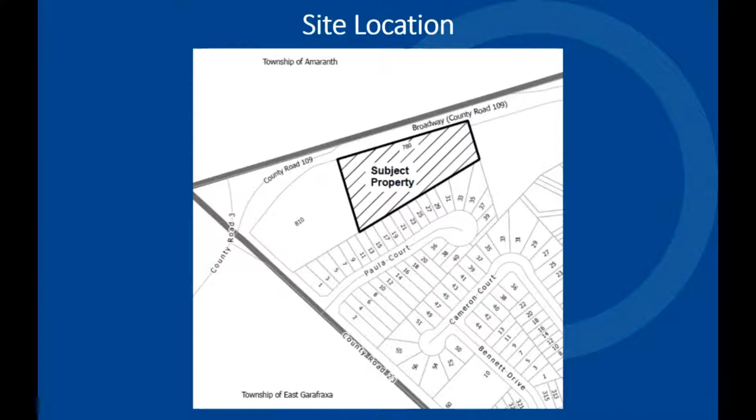It's situated just to the west of Riddell Road and to the east of County Road 23, otherwise known as B-Line. This is an air photo of the subject lands.

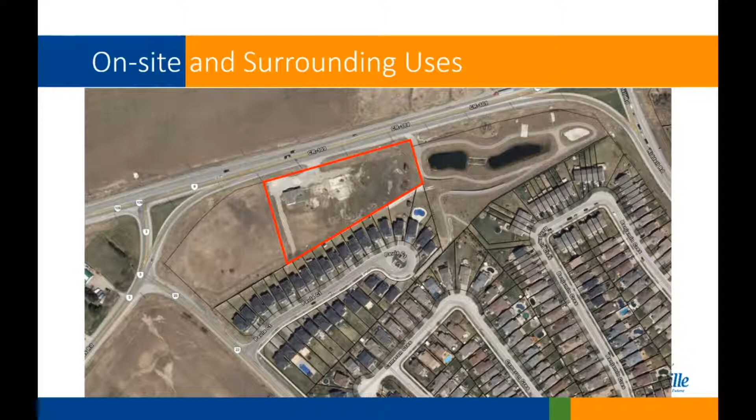As you can see, there's predominantly low-density residential connected with Paula Court to the south, as well as some townhouse developments on Benjamin Crescent, just to the southeast of the subject lands. To the east is a stormwater management facility, and beyond that, the lands to the north and west are vacant.

As I mentioned earlier, the applicant is present and will be speaking in more detail about this proposed development, and they'll provide more information about some of the particulars of the proposed site layout.

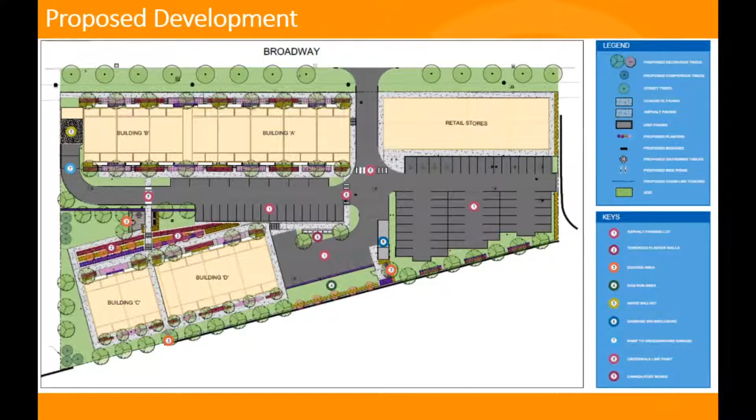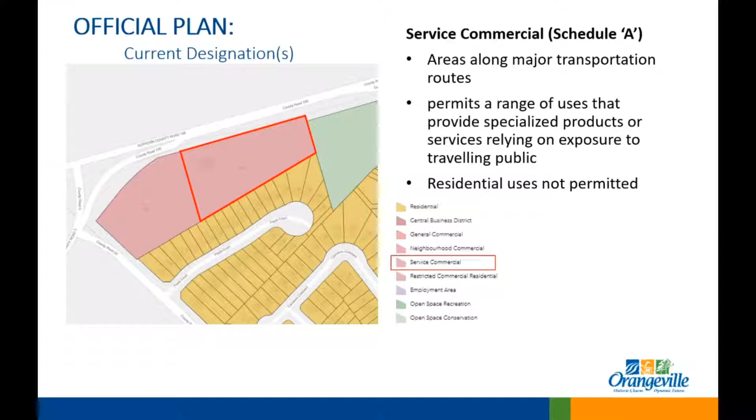Residential uses are not permitted in this designation, so the applicant has submitted a proposal to amend the official plan designation at this location. They're seeking to redesignate the property to neighborhood commercial.

Now, this designation applies to more localized areas, generally situated in response to nearby residential areas. As a result, these areas are intended to serve the day-to-day needs of those surrounding residential areas. Some of the uses permitted include limited retail, personal service uses, convenience retail, things of that nature.

Residential uses are permitted in the neighbourhood commercial designation, albeit only on upper levels above permitted commercial uses. So the applicant's amendment is proposing to add a site-specific policy to address that residential use permission on upper levels to accommodate the proposed development.

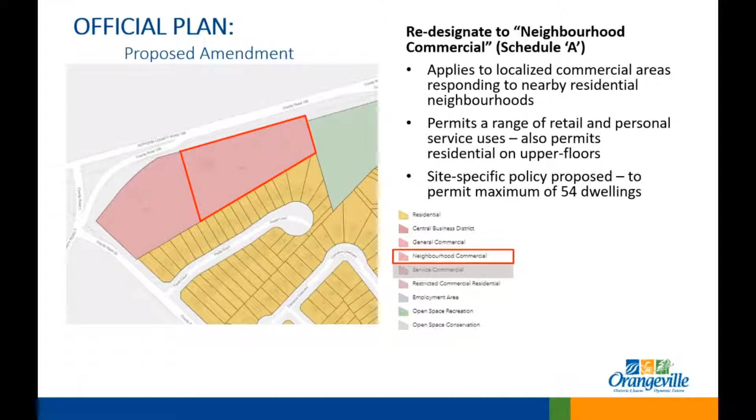The site-specific policy is to permit 54 dwelling units consistent with what is being proposed. In terms of the zoning bylaw, the subject property is zoned service commercial, again permitting a similar range of uses to what I mentioned with respect to the official plan policy framework for these lands.

There is a site-specific special provision applied to these lands. It permits an upper floor dwelling unit on the property. The language of this provision is very specific, and looking back at its history, it was introduced to the site in the late 90s as part of a broader town-wide commercial zoning bylaw review and update exercise that changed the commercial framework for the town.

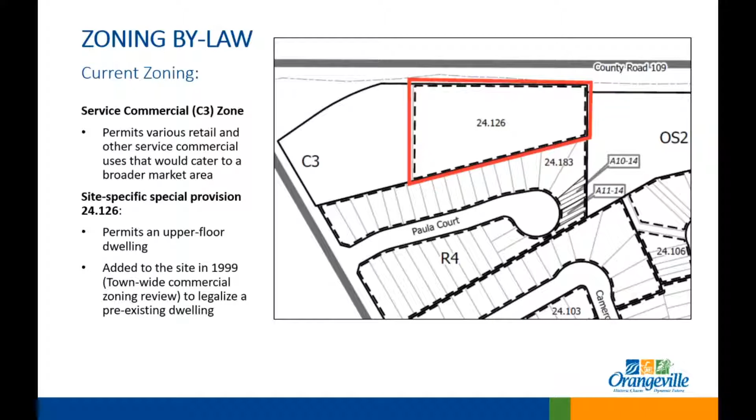As part of that amendment, there apparently was an existing residence on the property, and as part of the rezoning through that exercise, in order to avoid it from being deemed legal non-conforming, they added this special provision to basically acknowledge and legalize that existing use at that time.

So the proposed amendment is similar to what I described with respect to the official plan amendment. It's to rezone the property to neighborhood commercial, the C2 zone category, again to permit a range of commercial uses similar to what is considered by the neighborhood commercial designation in the official plan.

Similarly, they are proposing a site-specific special provision to accommodate some aspects of the development proposal, particularly with respect to building height and, again, a limitation on the number of units contemplated for this site.

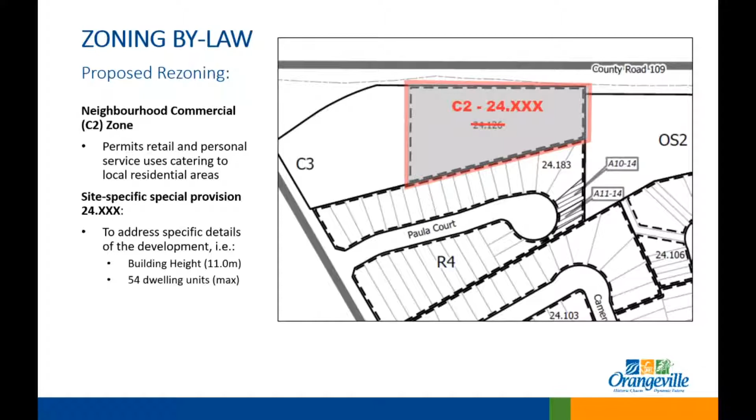So in terms of the comments received thus far, when the applications were deemed complete late last year, we did issue a notice for having received these applications. To date, we haven't got a whole lot of detailed comments. We've received more or less some inquiries about what is happening at this site, what the development proposal is, etc.

I do note there are some submission correspondence pieces on tonight's agenda recently received. Again, the purpose of this meeting is to obtain further feedback to that effect from interested members of the community. In terms of the circulation to agencies and departments, we've received fairly typical conditions from the major utilities and other public agencies.

Township of Amaranth was circulated on this given the proximity of these lands to surrounding neighboring municipalities. They've indicated no concerns with this application at this time.

We have received some detailed comments from some of our key agencies. I won't get into too much detail because there's more information in the staff report on tonight's agenda. Our infrastructure services environment division has reviewed this with respect to source water protection implications, providing comments on potential impacts to groundwater and conformity with the source protection policy regime. Our Transportation and Development Division has reviewed this with respect to servicing, traffic, and stormwater management.

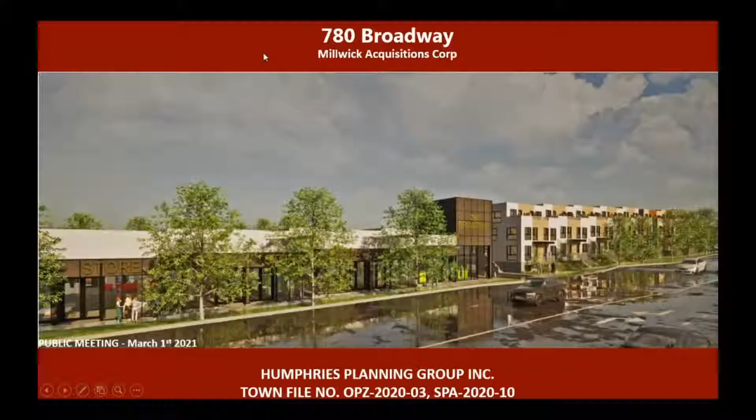Is everyone able to see my screen? Yes. Yes. Yes. Okay, wonderful.

Well, to start, good evening, Your Worship, members of council and members of the public. My name is Hisham Mohammed with Humphries Planning Group, and I represent the owners of the lands municipally known as 780 Broadway. The subject land is located at the western boundary of the town of Orangeville, within the inner edge of the existing urban settlement area between Riddell Road and B Line.

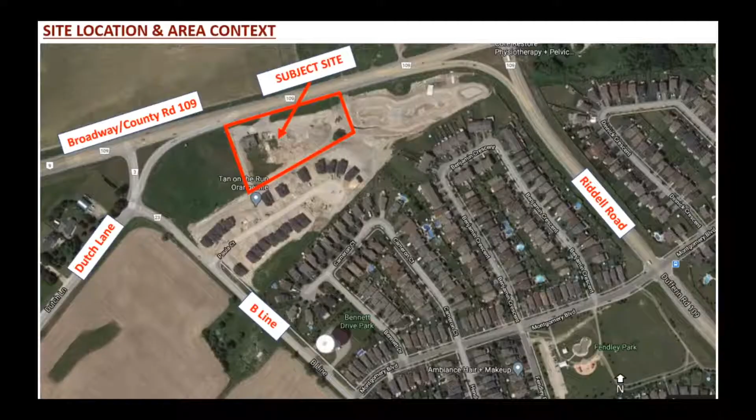The site is irregular in shape, has variable topography, and represents a significant decline in elevation from south to north along Broadway. The surrounding land uses consist of Broadway or County Road 109 and an employment area under the jurisdiction of the Township of Amaranth to the north, a vacant lot to the west, a low-rise residential neighborhood with single-detached, semi-detached, and street townhouse dwelling units to the south, and a stormwater management facility to the east.

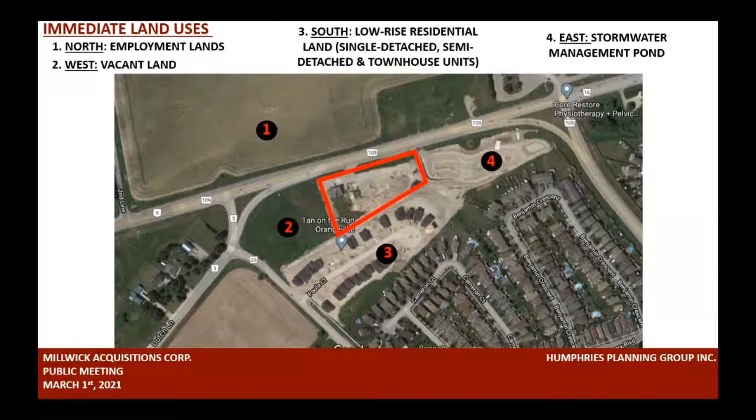The subject site has an area of 1.15 hectares or 2.84 acres, with a lot frontage of 163.68 meters along Broadway, and there's currently an existing temporary sales office on site.

Applications for an official plan amendment, zoning bylaw amendment, and site plan approval have been submitted to the Town of Orangeville to facilitate the approval of a mixed-use development consisting of 54 back-to-back townhouse dwelling units, as well as a standalone multi-unit commercial building, approximately 920 square meters in GFA, and a development density of 46.95 units per hectare.

There are 154 total parking spaces, which complies with the zoning bylaw requirement. The residential component consists of 108 total spaces, 48 surface parking, and 60 underground parking spaces. Additionally, the retail component contains 46 surface parking spaces.

Vehicular access to the site is achieved via an entrance from Broadway, located at the center of the site, which will be shared to serve both the proposed residential and commercial uses of the development.

An internal system of walkways establishes a comprehensive pedestrian circulation route, which serves to connect the various townhouse blocks, commercial space, amenity areas, as well as surface parking and the underground garage. The underground garage is accessed via a ramp located at the western property limits, extending from the internal private laneway.

A loading area, snow storage area, and bicycle rack have also been incorporated to service the development, and a shared waste collection area is proposed interior to the site and has been designed with a fence enclosure to screen the garbage bins.

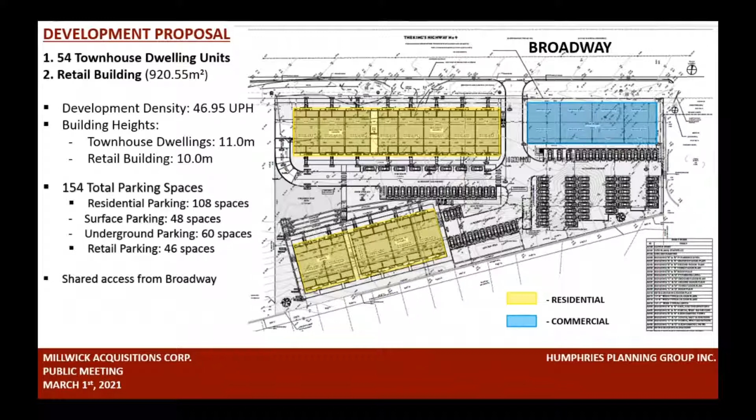A planning justification report has been submitted as part of this application and illustrates the proposal being consistent with the regulations and policies of the provincial policy statement, the growth plan, and the Dufferin County official plan.

The Town of Orangeville official plan identifies the subject land as being designated as service commercial. The purpose of the official plan amendment is to redesignate the lands from service commercial to neighborhood commercial in order to permit residential uses on the subject land.

The OPA seeks to recognize a broader potential for the subject land and expand upon the permitted uses, which already includes commercial uses. The proposal provides for an appropriate mix of uses and is compatible with the surrounding context. Additionally, it should be noted that residential uses are in fact permitted in the zoning bylaw.

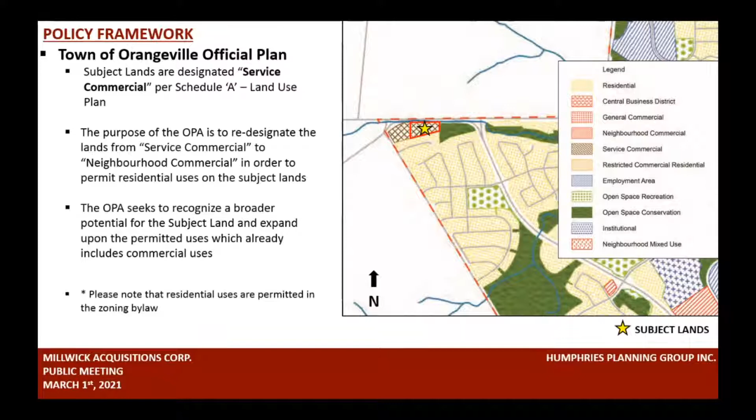The subject lands are currently zoned C3 service commercial and subject to special provision 24-126 per the Town of Orangeville zoning bylaw 22-90. Special provision 24-126, as Brandon had mentioned earlier, provides for additional permissions on the subject land, including dwelling units on upper floors of buildings containing permitted uses.

The proposed development will require a zoning bylaw amendment in order to facilitate the development of standalone residential uses. Currently, residential dwelling units are only permitted in upper floors.

The rezoning will replace the current C3 service commercial zone with the C2 neighborhood commercial zone in order to implement the proposal and to allow for the establishment of residential uses together with commercial uses on the subject land.

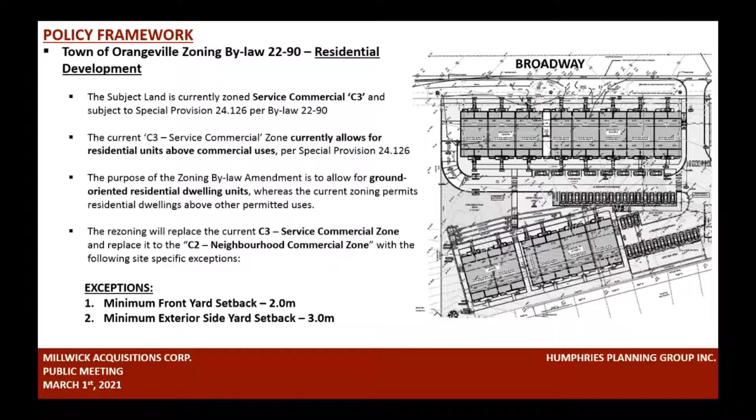Additionally, a number of site-specific exceptions are being requested in order to modify some of the neighborhood commercial build form standards, as you can see on your screen here.

The residential component of the development has been located on the western portion of the site and has been arranged into 4 distinct townhouse blocks of various sizes, each containing a specific number of dwelling units.

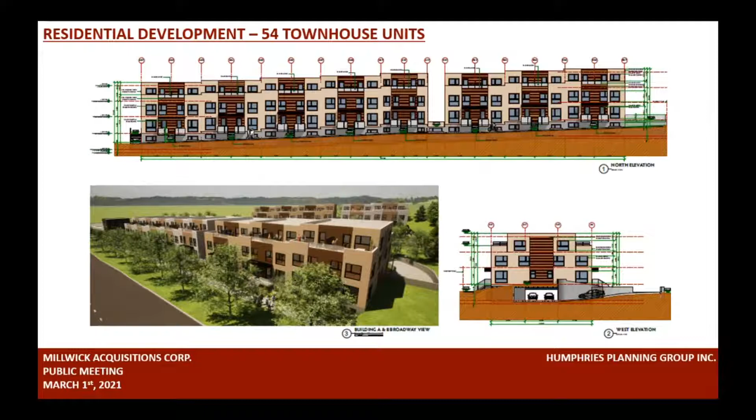As I had mentioned before, the residential development includes 108 parking spaces, or 2 per unit. 48 spaces are located on the surface, whereas the underground structure comprises 60 private garages corresponding to each unit and accessed via a ramp extending from the internal private laneway.

The residential townhouse buildings are 3 stories in height, or 11 meters.

The commercial component of the proposal is located on the east side of the development and is 920 square meters in GFA. The current C3 service commercial zone allows for commercial and retail uses, along with residential uses.

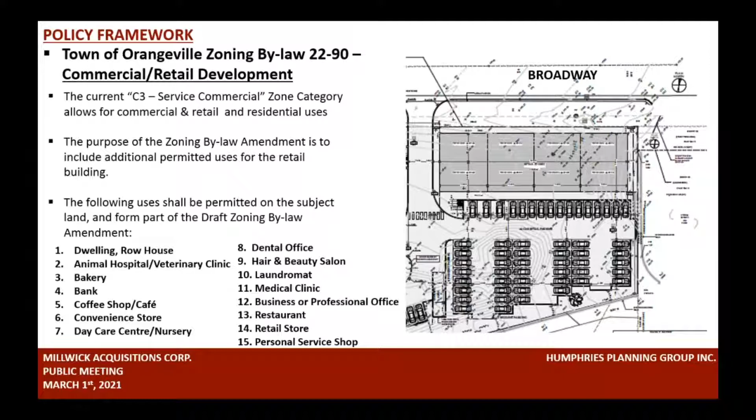The commercial component of the development has been designed as a multiple-use building containing 12 units. The retail building provides for 46 surface parking spaces located to the rear of the building and away from the Broadway street frontage where they're not visible.

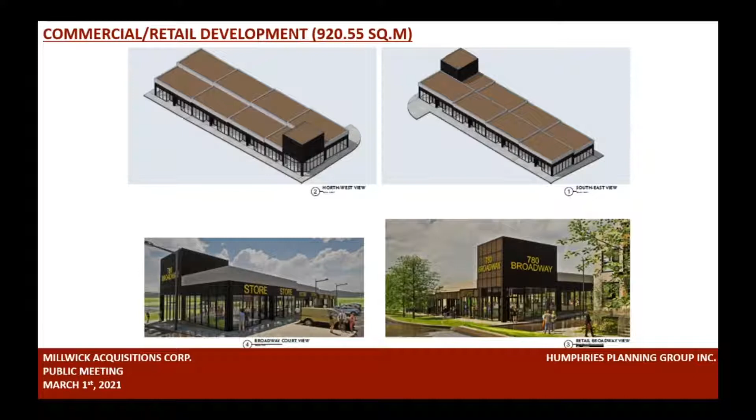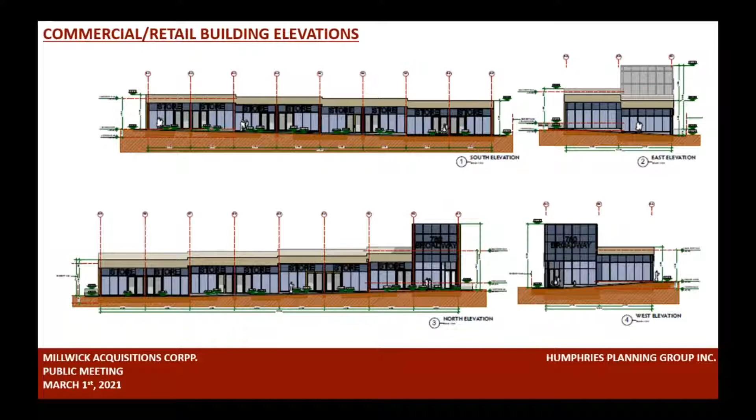The commercial building has a height of 10 meters, or 1 story, as you can see here on the elevations on your screen, which complies with the zoning bylaw's height standards in the service commercial zone.

As it relates to site servicing, the water supply for the development will be provided by the existing water main on Broadway. The sanitary servicing will be connected via a sewer connection to the existing sanitary manhole located on the southeast corner of the site.

The stormwater management for the site will be facilitated via controlled discharge to the existing storm manhole at the east side of the property. The proposed grading will improve the existing drainage conditions on the site in order to meet the town and county's requirements.

Lastly, a number of technical reports have been completed in support of the official plan, zoning, and site plan applications submitted to the town. At this time, we are working closely with town staff to address any comments they may have, as the application is still under review.

Thank you for your time, and I look forward to responding to any questions that members of council or members of the public may have.

Thank you, Mr. Mohammed. Before we take questions, I would like to acknowledge correspondence from Sheena and Stephen Snook, dated February 25th, 2021, which outlines their reasons for opposition to the proposed development. I would also like to acknowledge correspondence from Darlene Heron and David Webb, dated February 24th, 2021, which also outlines their reasons for opposition to the proposed development.

Councillor Andrews, do you have a question? I do, Deputy Mayor McIntosh, and thank you. It's actually a comment and a question, and thank you, Mr. Mohammed, for your presentation. I'll make a comment regarding at least the visuals.

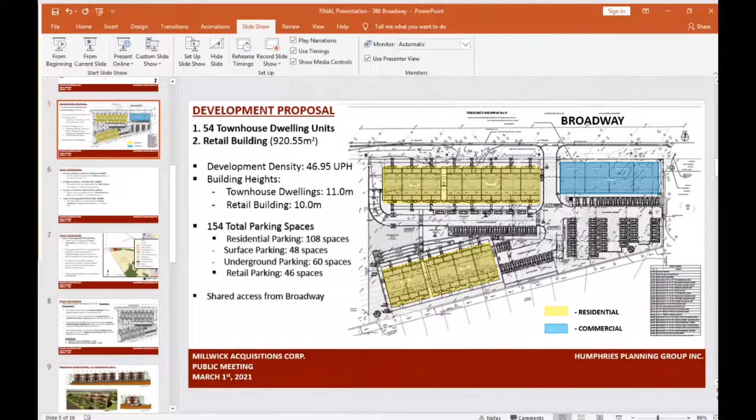Thank you very much for that response. That's kind of what my thought was going to be, that you would build up rather than out. So I just wanted clarification on that, and I appreciate that comment. Thank you. Absolutely.